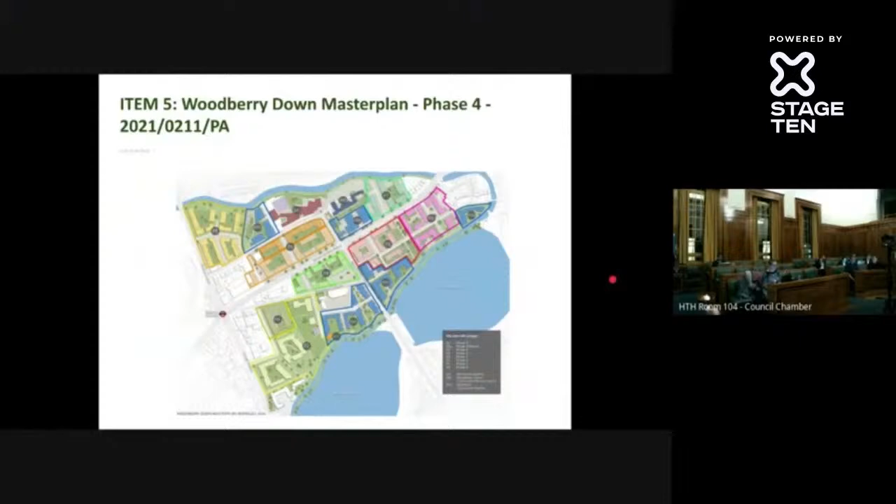The applications have been split out now as a result of various logistical requirements. So phase 4 is being submitted as a standalone application for full planning permission, with submission anticipated fairly shortly, and the remaining phases will be submitted as a master plan in due course. This isn't particularly clear, but phase 4 is located in the centre of the master plan area to the southwest of the junction of Seven Sisters Road and Woodberry Grove. It is within the larger site allocation within LP 33.

So as a result, its redevelopment for housing is acceptable in principle, subject to a suitably high quality scheme coming forwards that delivers other public benefits. The main proposals are going to be set out by the applicant this evening. They have been evolved in relation to the design from what you've seen previously. They have been subject to a level 1 and level 2 GLA pre-application process and TFL pre-app. And I'll now hand over to Martin, who will talk you through the detailed proposals.

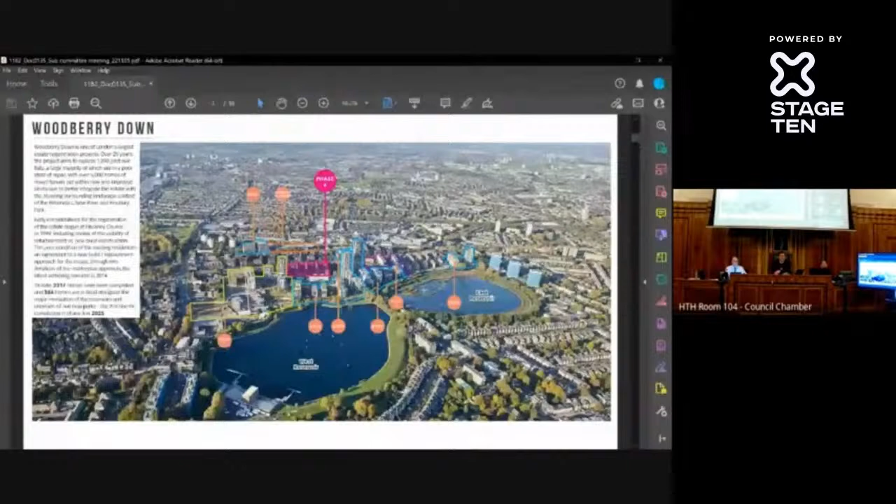Good evening. Right, I'm just going to share my screen and then we'll start. Great. Sorry, is that everything okay? Yeah, great. Thank you very much. So sorry, just for my knowledge, we've got quite a few in attendance here. Who is leading from your side? So my name is Martin Keefer. I'm the architect for the scheme, and I'll be leading the presentation. Perfect. Thank you very much. Off you go.

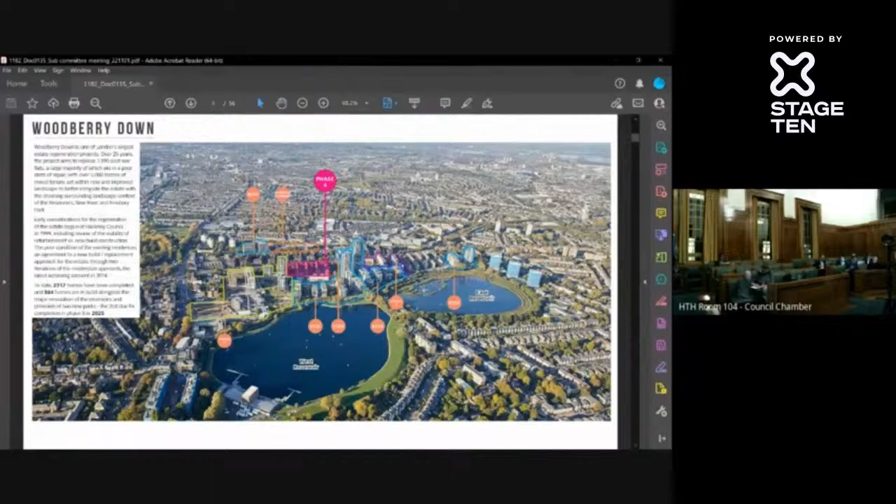Right, pleasure to be back here after a year and with some more detail on phase 4, which has evolved, as I hope you'll see, into a very forward-looking, high quality architectural scheme. I won't talk too much about where it is. Hopefully most people in the room are familiar with where phase 4 is on the scheme, but it does sit right slap bang in the middle of the evolving estate at Woodberry Down. That's the current site outlined in red on the screen. So we have Seven Sisters Road to the north, Woodberry Down to the south, Woodberry Grove to the east, and then St Olave's Church on the west side. Currently 6 existing housing blocks and about 200 dwellings.

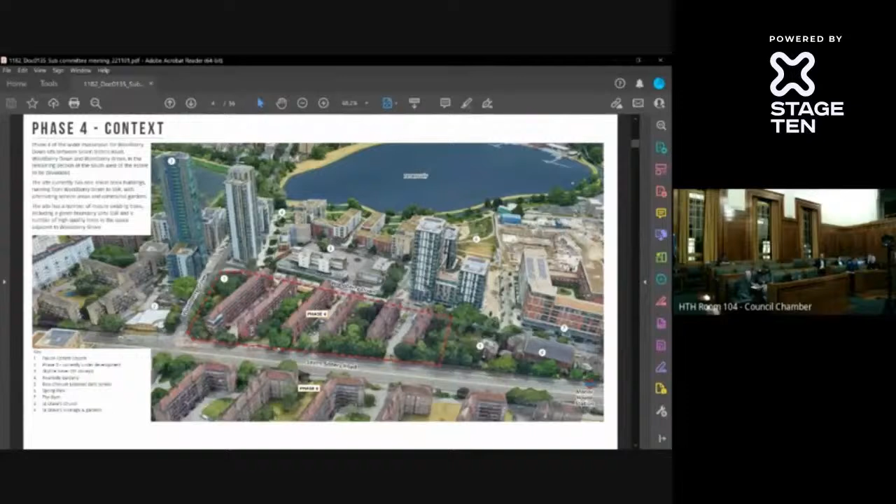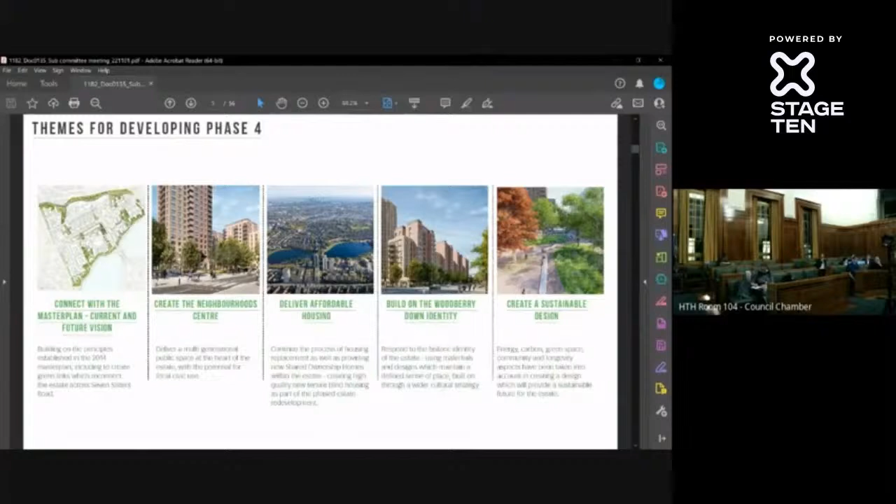What we'd like to do tonight is to start off by talking about some of the themes that have led the evolving design and approach to phase 4. They're summarised there on the screen, and I'll go through these in more detail. We're going to talk about how, while this is a standalone application, it does take into account the previous and the developing master plan. We're going to talk about public space particularly, and the importance of delivering the neighbourhood square, which sits at the centre of phase 4 as part of that wider master plan vision. How the scheme delivers affordable housing, how it's been developed specifically to respond to the Woodberry Down identity, particularly the historic environment at Woodberry Down, and we'll talk about sustainability as well.

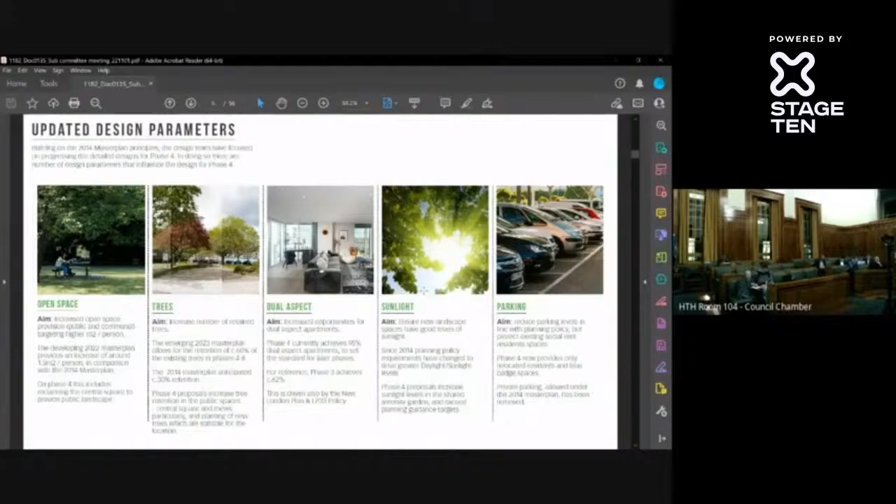Just to say that the scheme has evolved in response to a developing planning environment since 2014, when the original master plan was conceived and consented. So there are a number of things that are on screen. I won't go through these in detail, but these have been embedded within the developed design, from a greater consideration of trees and how we can retain more trees as a very pertinent local issue on the plot, to how the scheme responds to changing policy on things like dual aspects and sunlight, and we'll talk about open space and parking as well as we get in, because those are quite key factors in delivering phase 4.

So this is where we are today. Site outlined in red, sitting right in the heart of the Woodberry Down estate. Developed sites from the KSS sites through to phases 1 and 2 on the south of the plot, and then phase 3, which is currently under construction. And as we said, we are building in an environment that is part of that master plan. I'll talk a little bit in a minute about how that is achieved. But we're also part of a number of huge achievements that have been made at Woodberry Down and the developing environment down there, particularly around the reservoirs, and that's something that we sought to bring into our proposals.

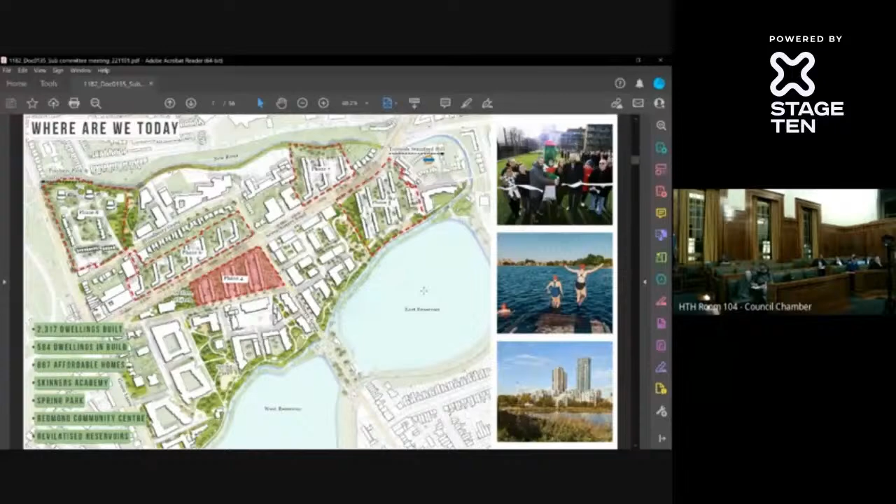That really has 2 significant impacts on us about delivery of public space, 2 key public spaces, one of which is the central square, which is going to be the main civic hub for the developing estate, and a more urban central space than they have currently, rather than the parkland that exists around Spring Park. And then there's another mews space that sits between our plot and St Olave's Church, again, part of creating that north-south connection across Seven Sisters Road.

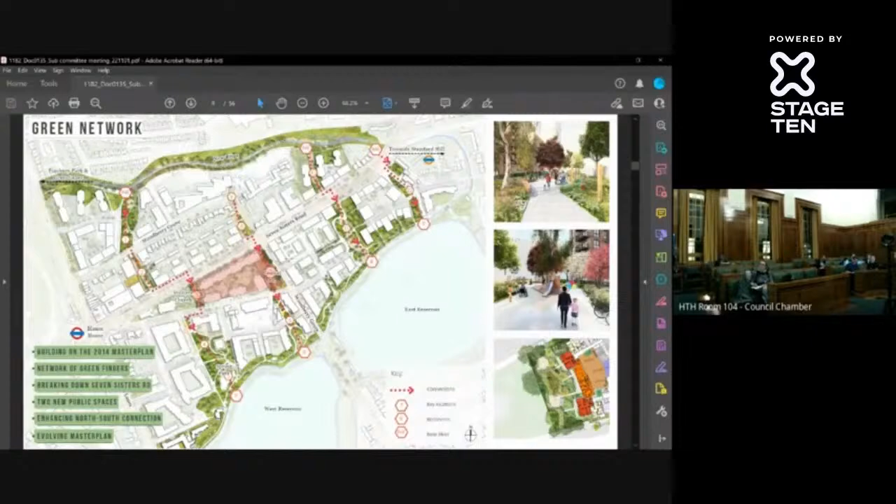That leads us on to thinking about Central Square itself, which is the kind of public set piece that will be at the centre of the development. We have evolved the scheme since the 2014 proposals to develop it in a way that responds, we think, more to the directionality and the routes within the scheme. So it previously was an east-west facing square, and now more of a north-south arrangement. That's really, as I say, to connect it into those north-south routes, so it's more one continuous green space as you approach Seven Sisters Road.

That change of orientation has also allowed us to retain more trees, and there are a significant number of very high-quality mature trees within that space currently, and we are maintaining all of the A and B category trees. That allows us also to build on their character to create a really vibrant and high quality public space that will be ringed at the ground floor with a combination of commercial and community uses.

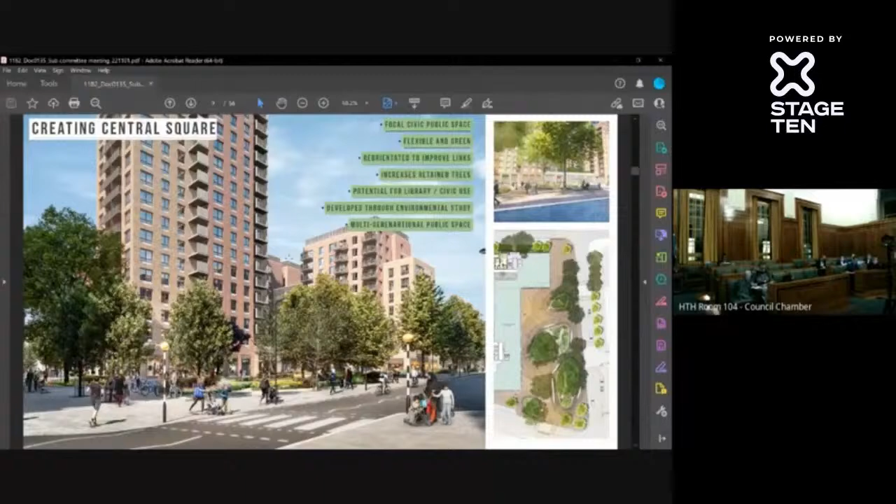There is ongoing work at the moment with the council to look at placing a library within that space as one of the main inhabitants. That's something that will likely go on beyond the submission of the application, but is a key part of delivering a civic space in the centre of the scheme. Mark will talk a little bit later about the landscaping here.

So we are also creating a significant amount of new housing, which is a combination of social rent, shared ownership, and new market housing. We have some tables later in the document that provide the exact split, but the total is 473 new apartments, just under 50% affordable by habitable room, slightly lower when you look at it by dwelling, 44%.

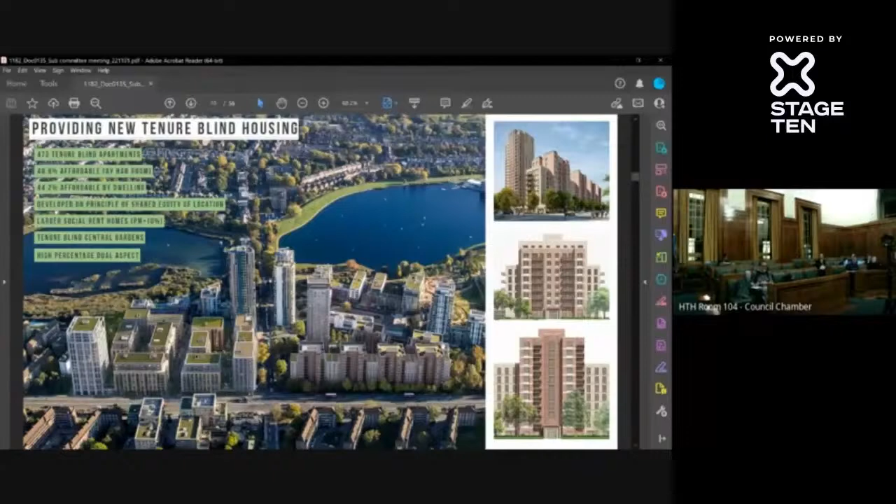It's been developed with the design that's inherent within the PDA agreement at Woodberry Down, which is a shared equity point of view, although we've taken certain decisions on the locations of shared ownership here, which I'll talk about when we get to the plan. And that's been done for some very specific reasons to reduce rental charges.

In terms of identity, this is something that we looked at and talked about, I think, briefly in the last presentation. We have looked quite carefully at the historic environment around the estate, not just at the new blocks, but also what qualities those existing blocks have, because they are very characterful, particularly the red brick buildings, north and south of Seven Sisters Road. And we've tried to build on that character in the delivery of a scheme which references Woodberry Down, but still looks modern and delivers high quality housing.

This is a view looking at the scheme from Woodberry Down towards Central Square. You'll see this probably a couple of times in the presentation as we go through. Predominantly brick with white banding and detailing that references back to the estate. We've also looked at and developed with consultants DPQ a cultural strategy for the site, which also takes elements of the local environment, and thinking about things like the signage and how do we build an architecture and a scheme that is specific to Woodberry Down.

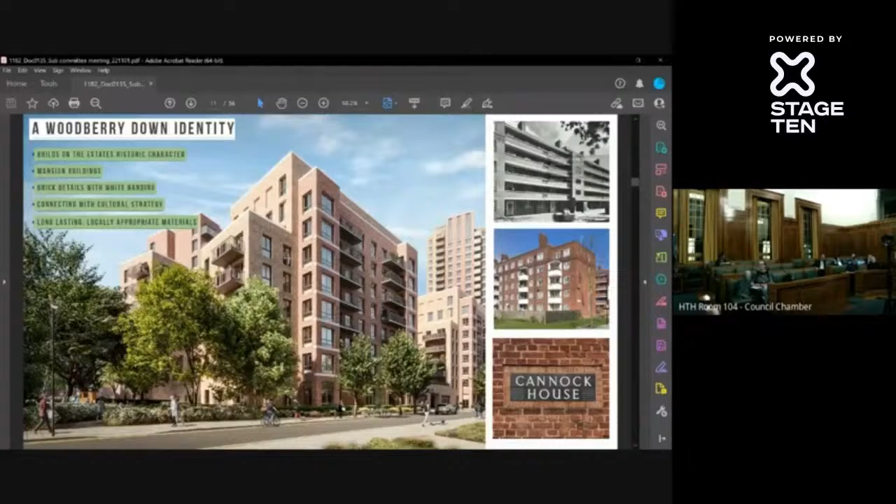And then just a quick slide on sustainability. We can build on this later on. The scheme does achieve GLA net zero carbon. It is part of a wider approach to decarbonising the estate, and we can talk a little bit later about how that's achieved in terms of energy performance. These things sit alongside a general approach to landscape and urban greening, which will create a very green site, both in terms of the public realm and the shared communal gardens in the centre.

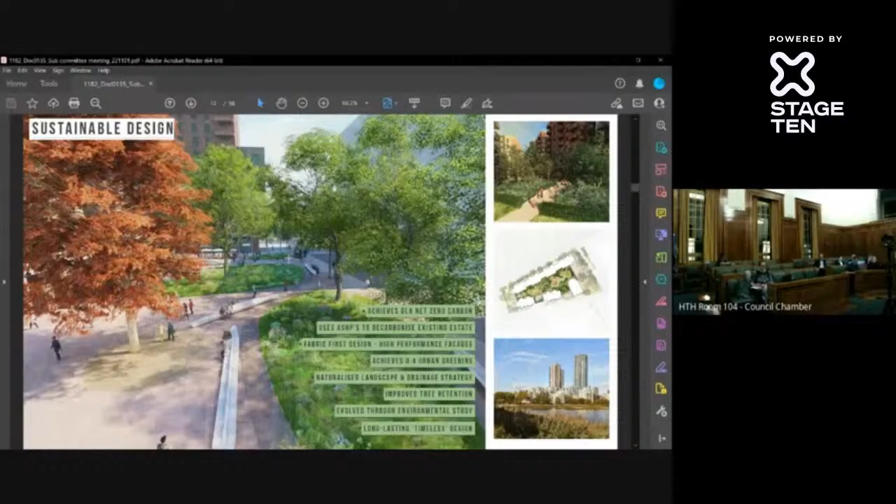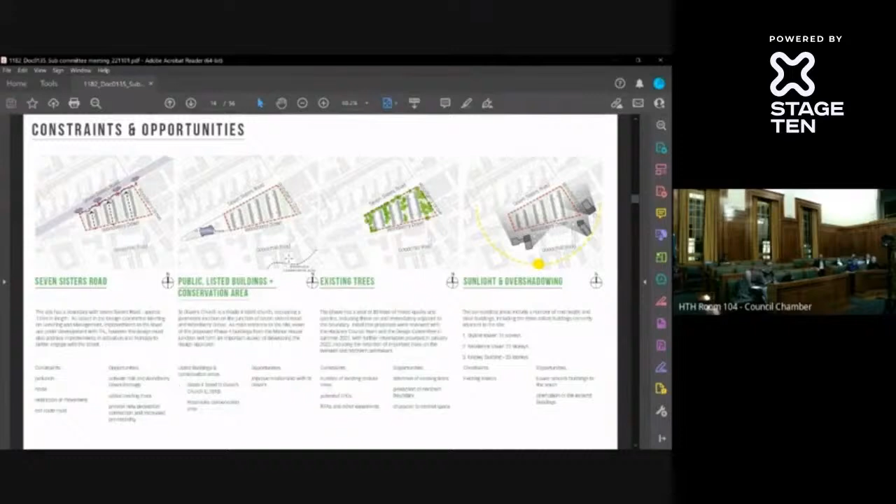I don't propose to dwell on this too long, but these are some slides that look at the issues that we're trying to resolve at Phase 4. So from things like Seven Sisters Road, which we know creates a noisy environment, the existing trees, which we've worked very hard to retain as many as possible, and sunlight and overshadowing from some adjacent tall buildings. Just to say that these things have been embodied in the design, and when we're looking at them particularly from an environmental perspective, I hope you'll see that those things have really led how we've approached the massing particularly.

These slides just look at the basic configuration of the site, and this is probably clearer in the next couple of slides, but we've looked very carefully at issues like permeability, how you move around the site. That goes back to the principle of the north-south links. We've looked, after review with your DRP, particularly at how the character of the buildings changes and responds to different conditions around the site. So from Seven Sisters Road, which is a much broader, larger scale avenue, to Woodberry Down, which is a much narrower environment. And that leads to a certain approach with differences in the building design, which we'll show you in a minute.

All of this has been underpinned by an approach to sunlight and daylight, particularly where we're looking very, very hard at how we get daylight and sunlight into the public spaces, into the apartments. And we have some real success stories in there in achieving really good quality and well-lit shared amenity spaces.

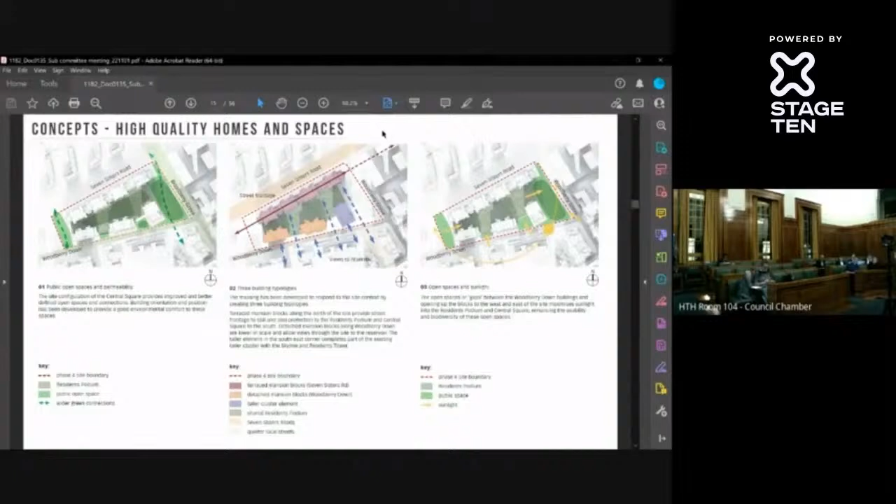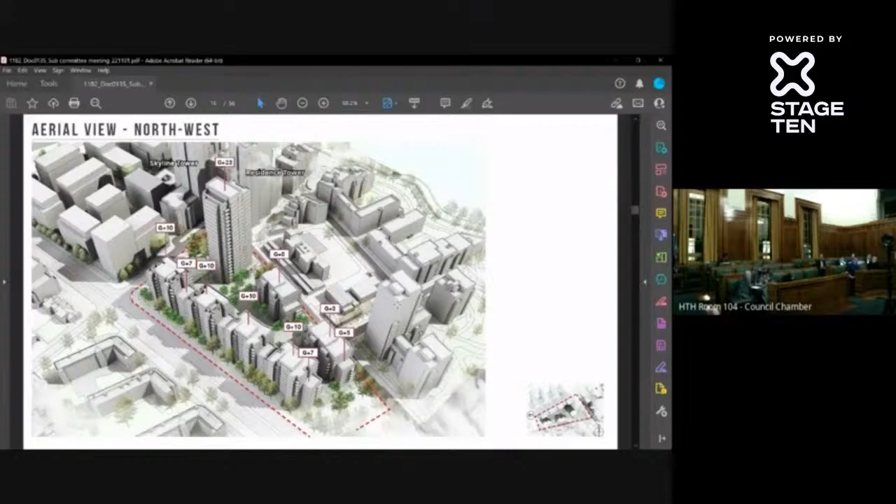Behind that, there are two lower buildings on Woodberry Down. They are ground plus 8 storeys, these two with lower shoulder sections. And again, they're starting to think about that smaller environment along Woodberry Down. And then in the corner, the taller building, which is ground plus 23, sits below the two existing buildings, which are 31 and 27 storeys. So almost the little brother of those three. The placement of the tower has been developed in response to both local townscape issues and wind and microclimate views, which we'll evidence shortly.

Just another view looking back, as if you were standing on top of Residence Tower, back towards the plot. And one thing you begin to pick up in this view is, while the buildings on Seven Sisters Road are more continuous, those on the south of the site have significant gaps between them. What you're seeing in the middle there is a podium garden, which is shared by all of the surrounding buildings on phase 4. And those gaps between the buildings go a long way to creating good quality sunlight, both in that communal space and within the apartments that surround it.

So this is the site plan. It's a section taken through at first floor level, looking down. So you have the configuration of the buildings on the north and the south, and then you see all of the spaces in between. To be clear on this drawing, the green spaces that you're seeing are at 2 different levels. So the space in between the building is at first floor, and then the surrounding spaces, so between St Olave's Church, the Mews on the left-hand side, and Central Square on the right-hand side, and the spaces ringing the roads, they're all at ground floor.

Mark will talk a bit later on about how this helps us achieve very high urban greening factors, but it is, when you look at it from above, a very green site, and we're creating a lot of space for residents of the site and of the estate to utilise.

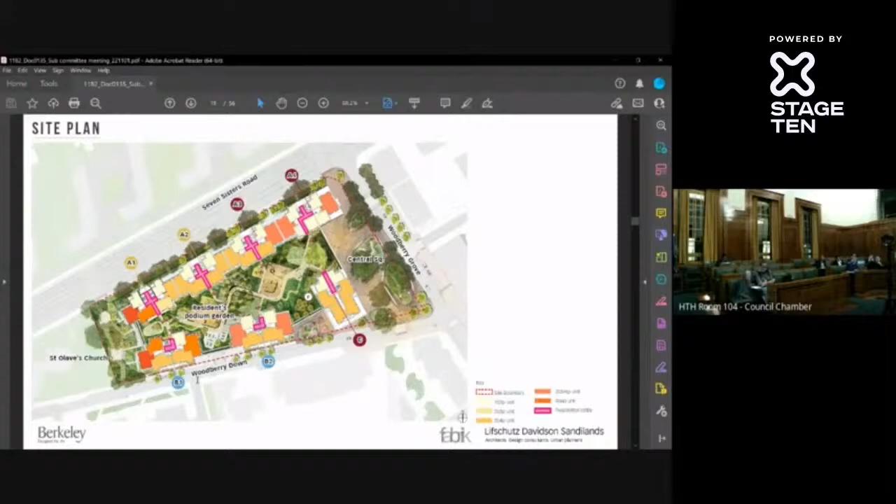We started off with a slightly different arrangement here, where actually there was 1 of each tenure on each side. As part of the work that we've done with the local community through the design group, that has been amended with a particular focus on service charges. So by locating the social rent on Woodberry Down, we can ensure that those buildings are serviced as easily as possible. So they don't have to use the podium that sits between the buildings, and that means we can keep the service charge for those residents down. I'll talk in a bit about the podium in that.

So this is then the ground floor of the building, as you see, stripping away that podium garden. What we have here is a central space which is largely providing parking. Now in this case, 64 parking spaces. This is being driven by part of the estate regeneration approach at Woodberry Down, which protects residents with existing parking spaces. And the work that's been done on the expectation is that the number that will move into here with parking spaces will then be accommodated within that space. It's not all of that. There is some disabled and accessible parking within there that also goes towards achieving other aspects of policy.

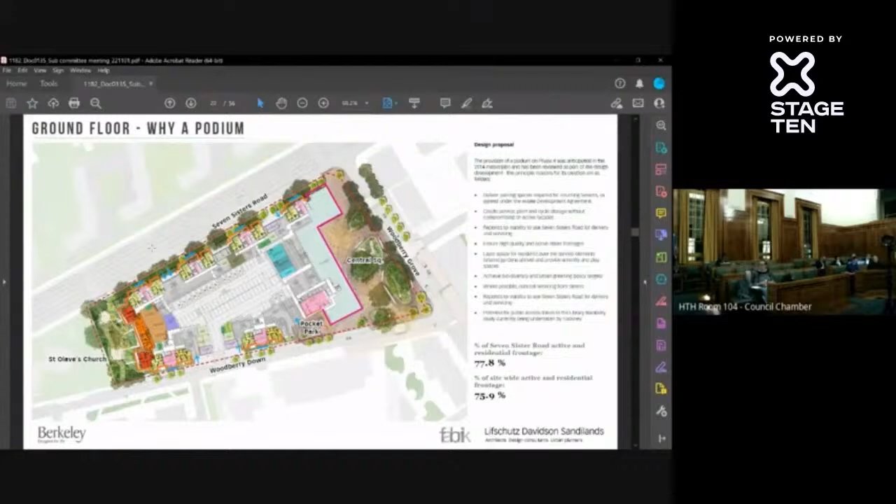What the podium does allow us to do is conceal all of that away from street. So the building is actually largely surrounded by active uses, be that housing, or in the case of facing onto Central Square, the shops and retail units. Overall, approximately 75% of the perimeter is active. And that's, as I say, largely achieved by using the podium to conceal the bins, the bikes, and the parking space and the plant spaces in the centre.

A couple of slides on the environmental studies, and I'll talk a bit more about the right-hand one, which is wind. But as I say, we have looked very, very carefully at air quality, noise, solar exposure, and wind as a particular local issue. I won't go into these in detail, but the design has been heavily informed by making sure that in terms of sunlight, the central spaces are all well lit, and we achieve, I think, compliance with the BRE design criteria on sunlight with about 90%.

In terms of noise and acoustics, the building form being more continuous onto Seven Sisters Road actually shields the rest of the development. So noise conditions within the podium garden, and for those people with windows then on the south side, are protected from the noise of Seven Sisters Road.

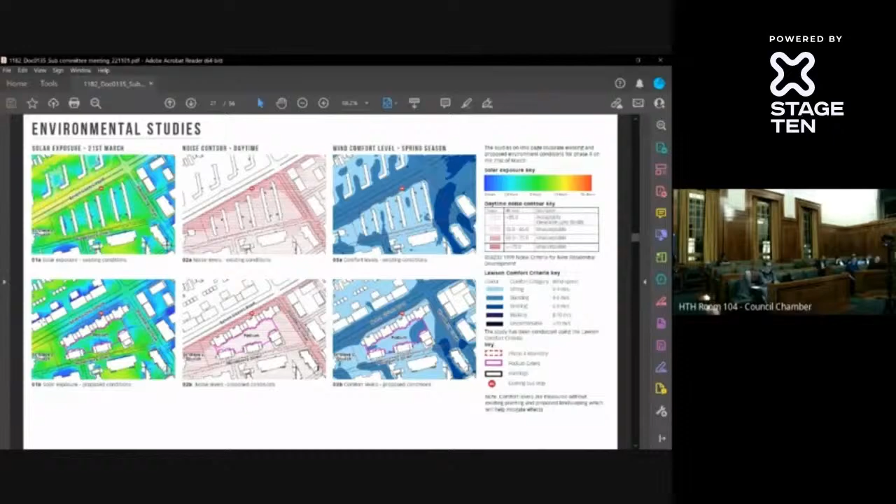And in terms of wind, we're aware of the issues that residents have felt around the base of the two existing towers, and have been working with RWDI as a wind consultant throughout the development of the design to make sure that the conditions within the central square are suitable for its proposed use as a civic space, and one that people and residents can enjoy.

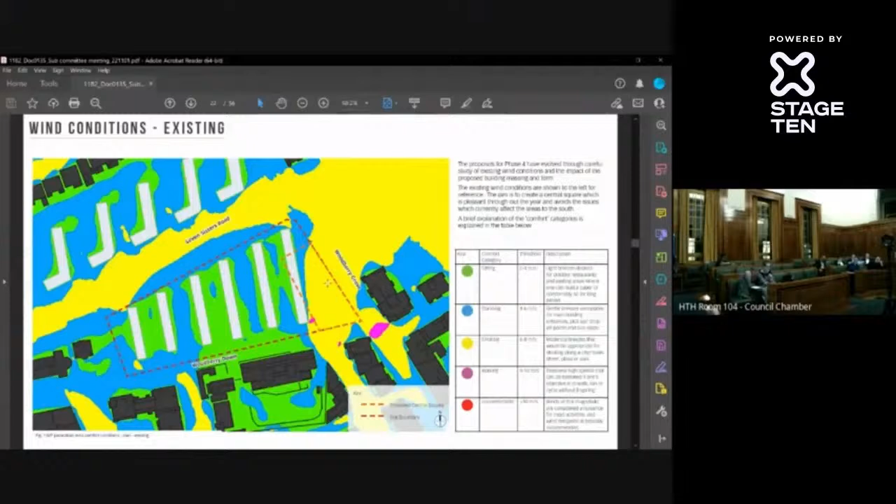This is actually the existing conditions on site, and you will notice the green colours are sitting quality, and then it works through the colour range down to the more uncomfortable ones of walking and uncomfortable. And the existing studies do show issues around the base of the two towers in particular, but largely in the current condition what will be the central square is in a yellow condition, which is predominantly for strolling rather than sitting.

As I said, this has really informed the way that we have approached our design, and we've worked from the start with the wind consultant to ensure that conditions within that space are positive and suitable for use. That goes back to the developing of the massing, which the way that it raises from St Olave's Church towards the centre with the predominant wind flow is actually helpful for getting the wind over the site and over that square, to consideration of building form, the canopies, particularly around the base of the building, and the landscape design.

And where we are ending up, these couple of slides show the development along the route, but the current anticipation is that wind quality within that space will be predominantly within the sitting category, so suitable entirely for the purpose that we want to use it for. There is some standing that comes about as a result of the two existing towers.

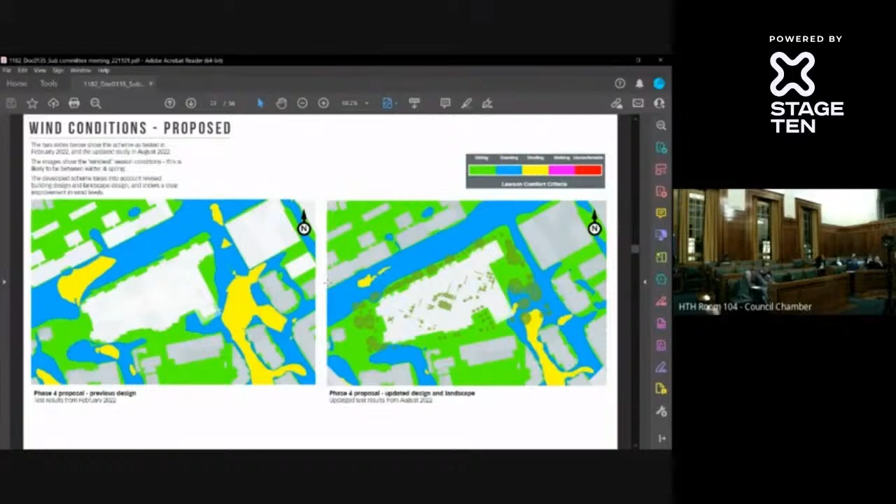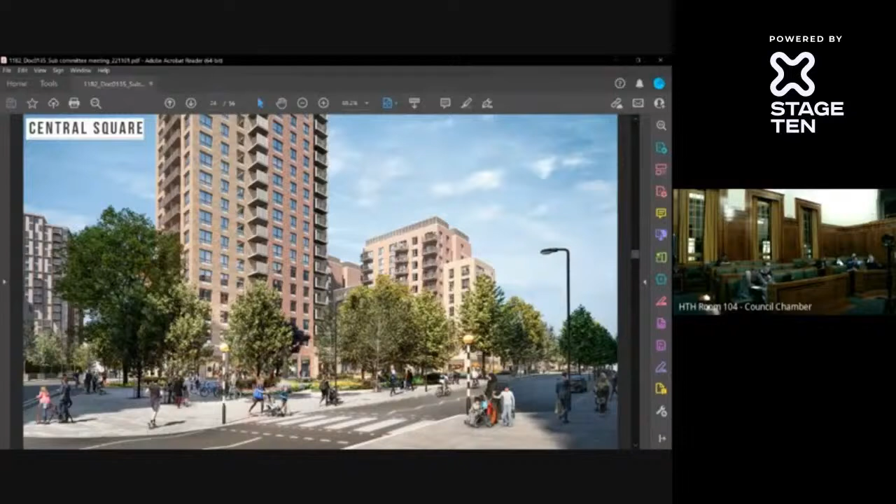So back to that image of a central square and the place that we are looking to create here, framed by the new buildings on the far side, although worth picking up on in this view. So one of the things that we did very early was ensure that there was a gap between the tower and the buildings on the north side. What that does for that space is make sure that you actually get sunlight in it from various points in the day. So you'll get sunlight within the afternoon for different types of activity and purpose.

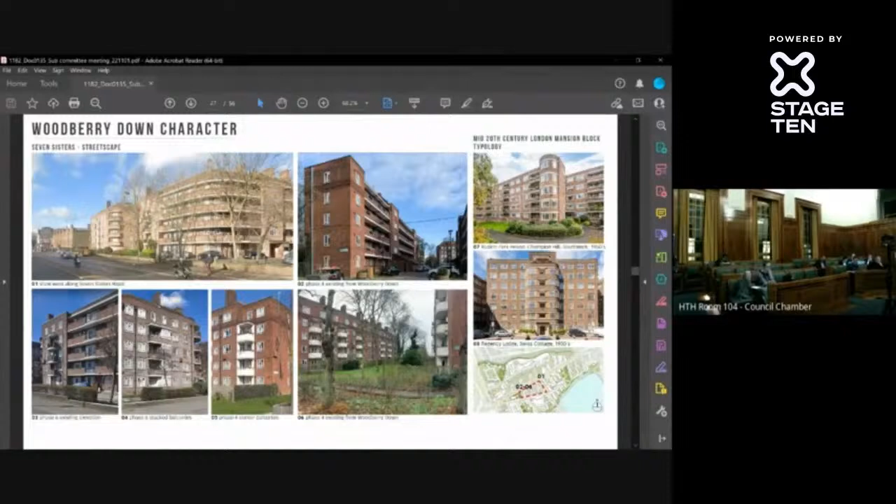Well, it predominantly means brick buildings, often quite simple in terms of their configuration, but they use features like the white banding that's quite characterful at the estate at the moment, and vertical bays within them to create views. And those are all things that we've embedded within the developing design.

3 building typologies, as we explained: Seven Sisters Road, Woodberry Down, and the Tower building. And I'll just quickly show you what that means. So this is one of the buildings that faces onto Woodberry Down. The 2 buildings are principally the same. They vary a little bit for precise configuration.

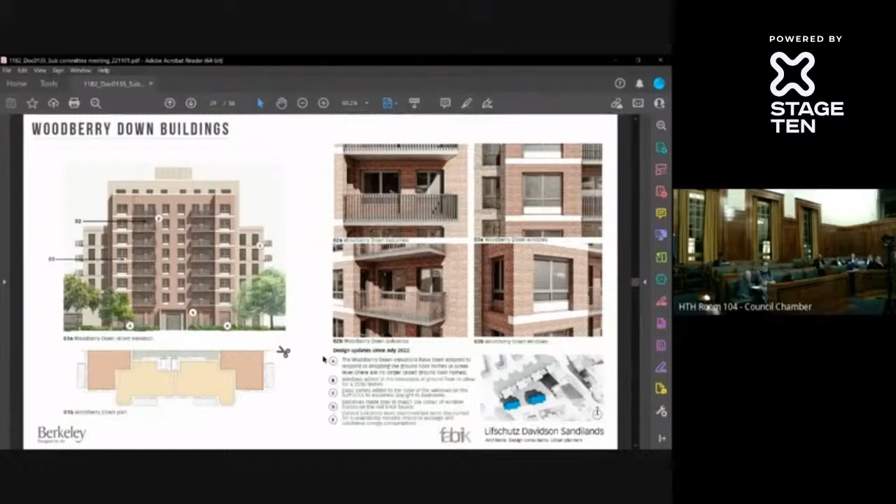So they have a central entrance at ground floor with a covered canopy, and this is where we're looking at some tile details to build on that historic tiled building entrances as part of a characterful part of the streetscape, but a very clear entrance in the middle of the building. 9 stories above that with a combination of red brick and buff brick, using bay windows particularly to build on the design.

And if I flip to the plan, the buildings use a central stair and lift core, with clusters of apartments either side. This is done quite carefully to ensure that there are little groupings of entrances into the flats at either end of a short corridor, so not big long corridors, naturally daylit wherever possible, in this case actually through borrowed light through the stair, and then a building form which uses a lot of corners and projections to get dual aspect into all of the apartments.

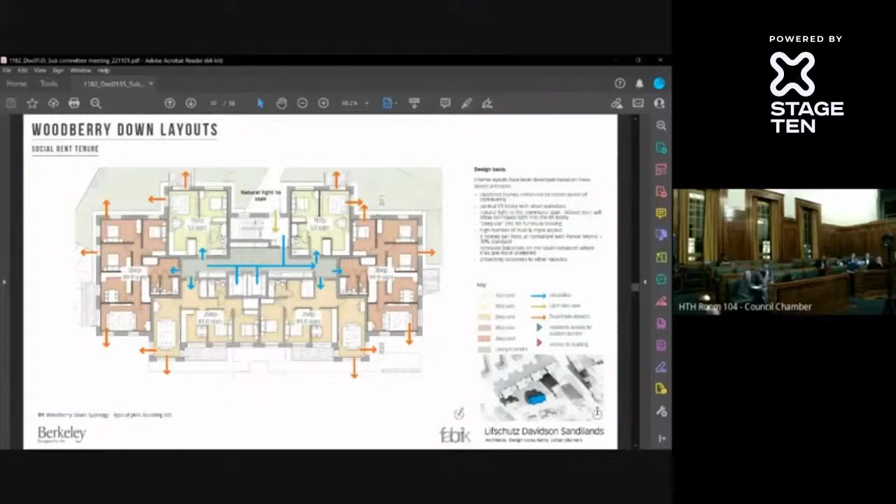You'll see that theme actually continue in the buildings on Seven Sisters Road. So this is looking at it from the Seven Sisters Road type. These buildings are taller, up to 11 stories. Again, central bay, configured around a central entrance with similar qualities to the one that we were looking at on Woodberry Down. Lower shoulder sections between of ground plus 7, sorry.

Now, one thing to pick up on here was whereas the Woodberry Down buildings are entirely symmetrical, in this case you'll see that the building on the front is actually asymmetrical. The balconies are both on the same side. That's been done in response to wind and daylight conditions, so that for both of them the balcony gets the benefit of west-facing sunlight in the afternoon.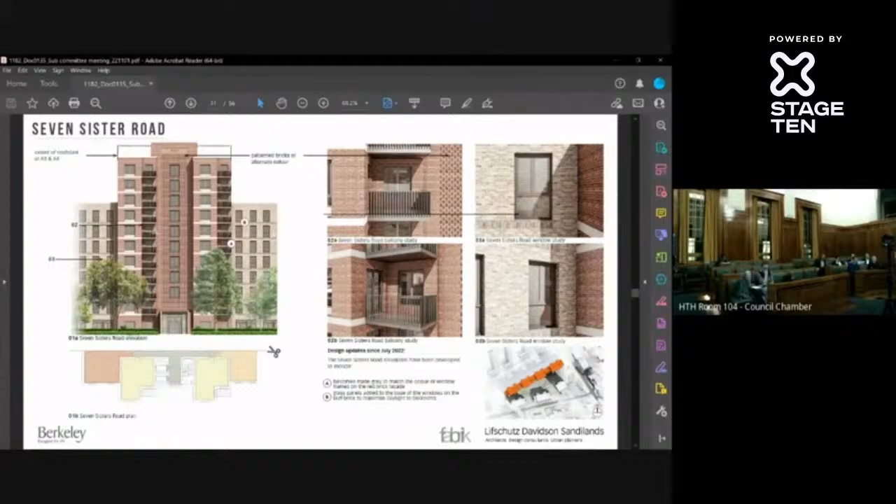Again, similar type of plan. Short corridors with clusters of apartments. In this case, because the buildings terrace along the length, the apartments on the ends are through apartments, so run from Seven Sisters Road through to the south to get dual aspect on those properties.

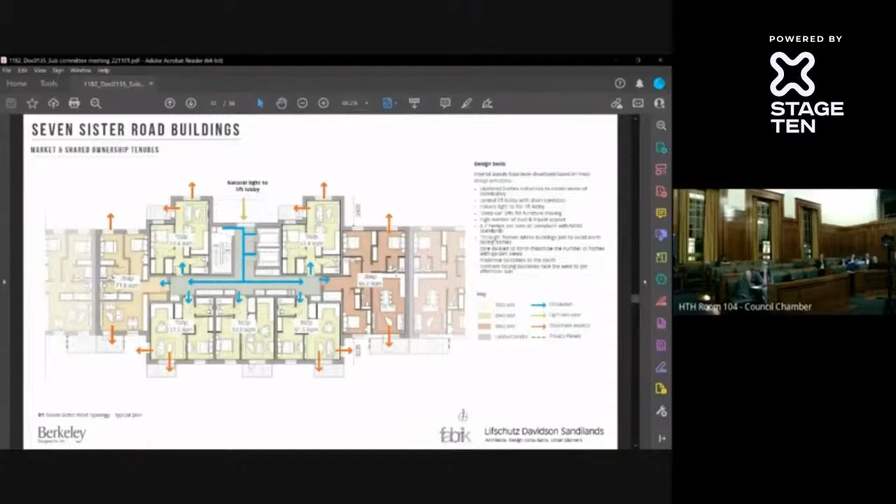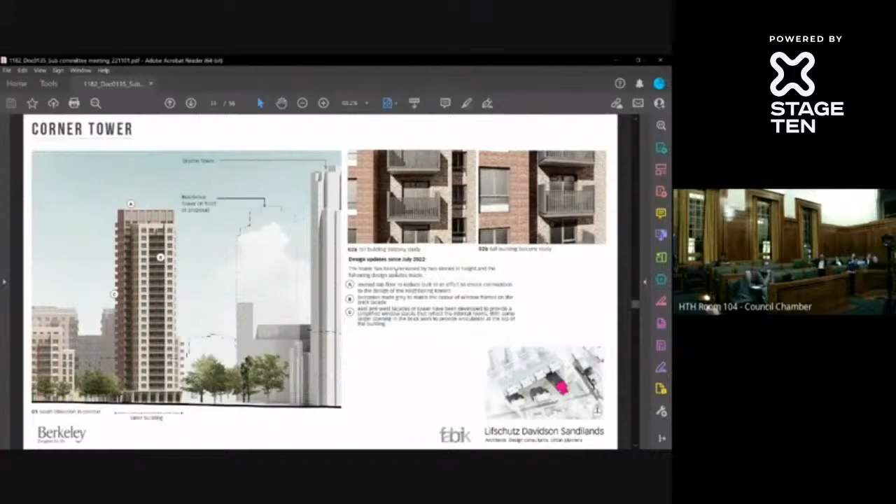And then lastly, the tower, which sits at the corner of the site, 24 stories tall with quite an expressed ground floor that develops into the commercial and community areas around the square. The building's broken down into several segments, so there's a variation of height in the top, and you'll see how that appears in some of the views. But again, it uses the same palette of red and buff brick. I won't go into this in too much detail, but the plan's there if there are any questions later on. It follows very much the same principle as the other ones, developing large amounts of dual aspect around the core.

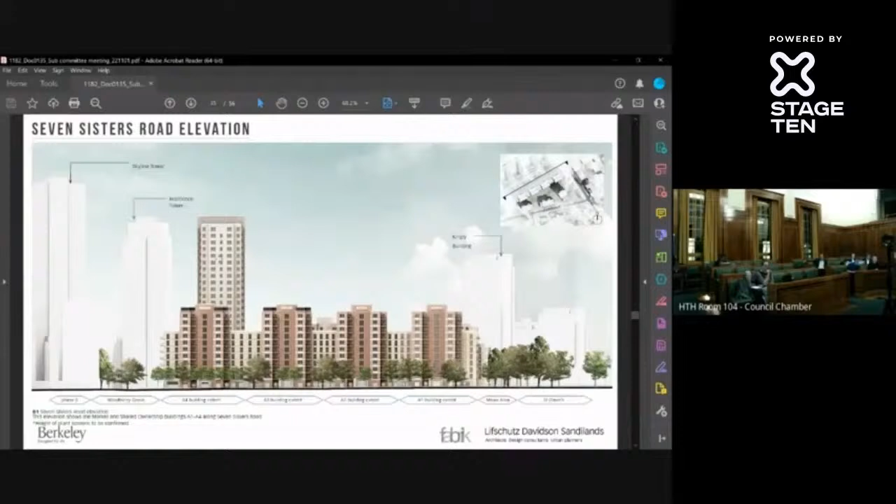And then looking at the combined set of buildings, so this is looking back from Seven Sisters Road with that developing skyline of the buildings along the front, so the variation in height that gives the road a rhythm to it, with the tower peeking up in the background, set behind those mature trees retained on Seven Sisters Road. Looking at the same proposal back from the corner with Woodberry Grove, central square on the left-hand side of the image, and then working back towards Manor House on the right.

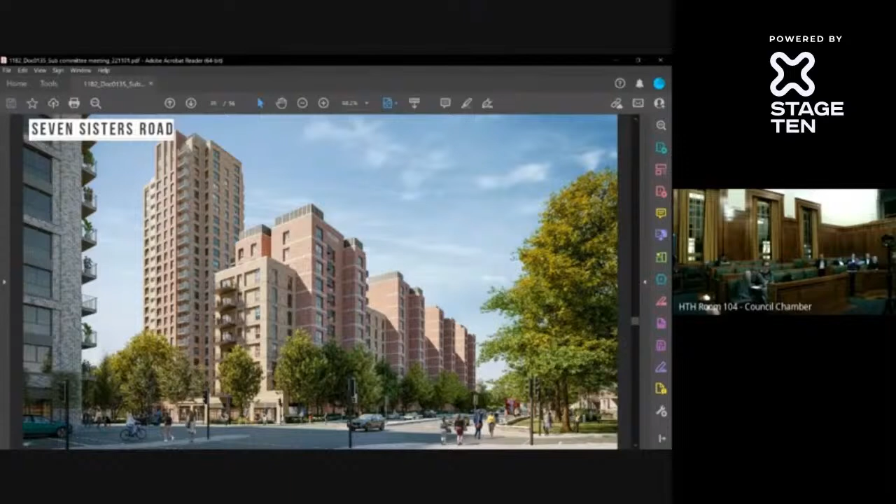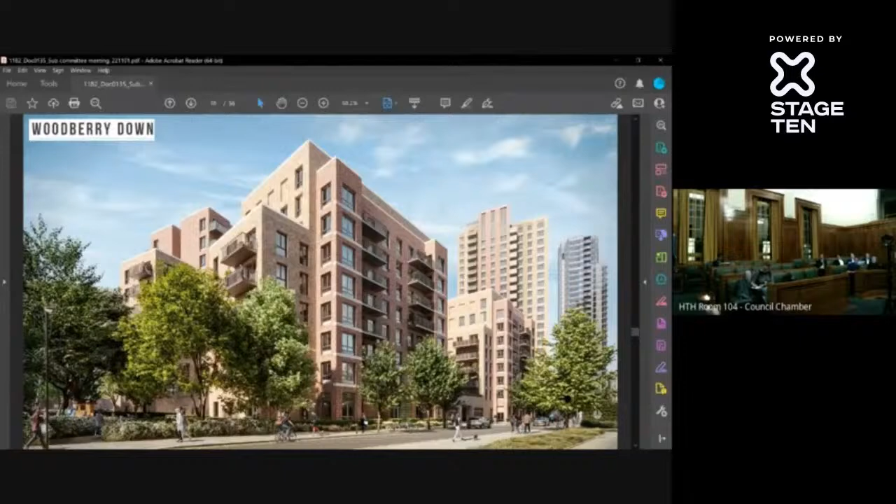Looking at the site from Woodberry Down, in this case with those individual buildings with the significant gaps between them. And back to that view, which is looking at the site from Woodberry Down. On the left-hand side is the pedestrian connection that is referred to as the Mews, and that's because it has duplex accommodation at the ground floor, part of the delivery of some of the family social rent dwellings. They look on to a landscape space that will also deliver play space for use by residents of the plot and the estate.

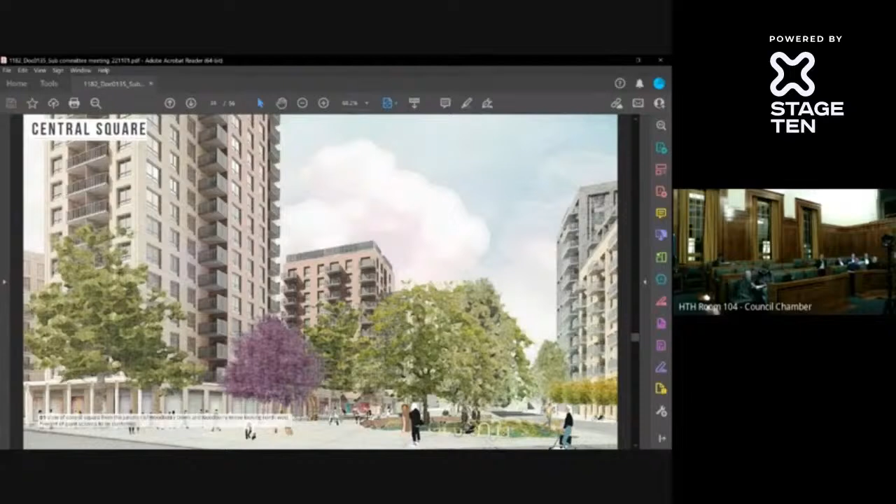And then finally, looking north from the junction at the base of Central Square, with the tall building on the left and the Seven Sisters Road buildings at the back there, built around, as I say, the retained trees in the centre. So I'll hand to my colleague Mark, who's going to talk about the landscape design.

Good evening. My name is Mark Bell. I'm from Fabrik Landscape Architects.

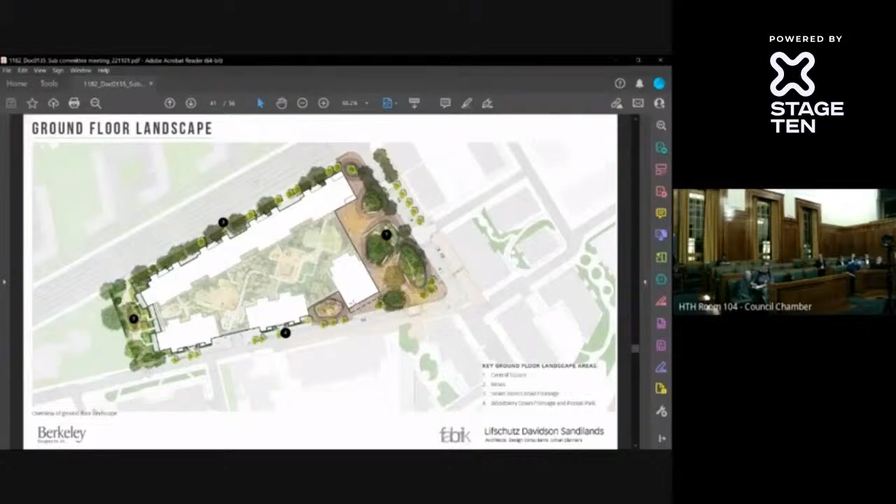On the first slide, we can see the 4 components that make up the ground floor landscape. Slightly hidden from view is the podium, which is a story up. There's a later slide which discusses that. Effectively, on the right-hand side of this drawing, you have the central square, which is circa 3,700 square meters. On the left, the smaller Mews space, which is a north-south space, with St Olave's Church to the left-hand side, and then to the north, Seven Sisters Road, and to the south we have Woodberry Down. Do you want to go to the next slide?

What these slides essentially show is the genesis of this design for the central square, which really is led by the retention of those trees and the protection of those trees and the incorporation of them as centerpieces in the design. From the get-go, we've been working with WDCO and listening to the community as to what makes this area distinctive. There's understandably a great pride in this area. And we all roundly agreed that it's the nature and the context that makes this distinctive.

And although Central Square and this site is somewhat disconnected from those obvious signs of that nature, that being the reservoirs and the New River, effectively what we tried to do here is hold up a mirror to that context and bring as much of that in as we can. So on the left-hand side, that shows the existing trees and the retention of those, which start to form this language of elliptical, soft landscape pieces, which start to frame the harder landscape pieces.

There is open space here that's designed to be mixed use and flexible, and try to lend as much life to the emerging building design as possible. So this envisages both a place that's on the way somewhere, so this is both a connecting space, but it's also about trying to slow people down and create a successful space in and of itself.

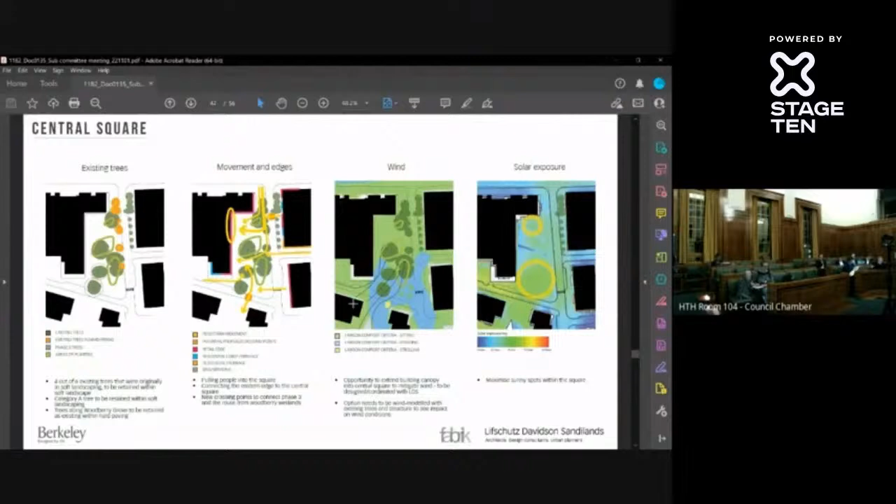So we've adopted an informal approach to retention of those trees. We tested all sorts of approaches to how formal this space is, and we adopted this informal approach of soft landscape islands, something that is evocative of a waterside location, and that runs into pretty much everything in terms of the approach we're taking.

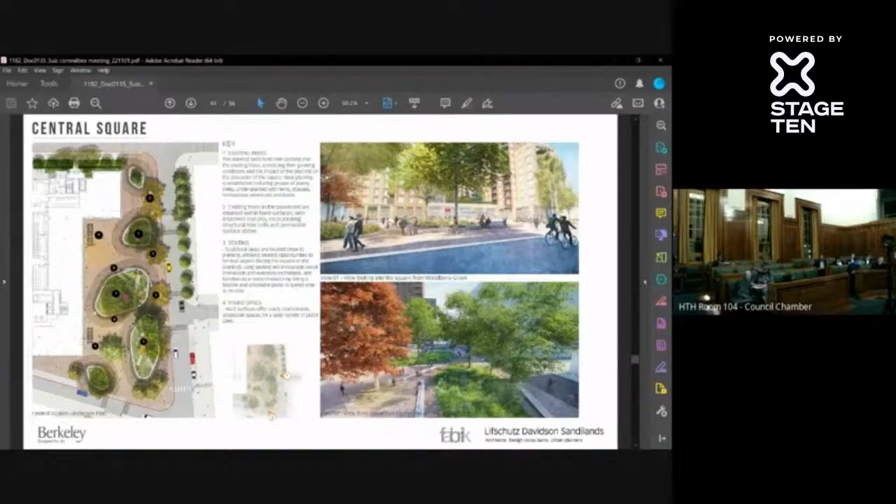So these soft landscapes are, where possible, bowled in order to try and collect as much of the rainwater as possibly can, but they're also designed with nature and biodiversity in mind. So what we're looking at is a functional, an engineered soft landscape rather than something that's merely visual amenity. Next slide, please.

Okay, just moving on to the Mews space, which is about 570 square meters. It's currently a backyard site, really. It's a very narrow route that's about 13 meters wide that passes from north to south. It's an informal route, but it's a route that not many people legitimately use. And then you have a building whose facade is approximately 13 meters away from the boundary. And then there's a 5-meter garden within that space as well. So it's currently fairly disused and possibly attracts antisocial behaviour.

So it's effectively an exercise in widening that space, creating a new north-south link, which joins up with the proposed crossing that goes over Seven Sisters Road. And there's an additional crossing to the south, which crosses Woodberry Down, and it's also an address to 4 of the units which look out onto that space. It's a very important piece of the play strategy as well. There are some very large retained trees in the centre of that which will lend it almost immediate character upon completion.

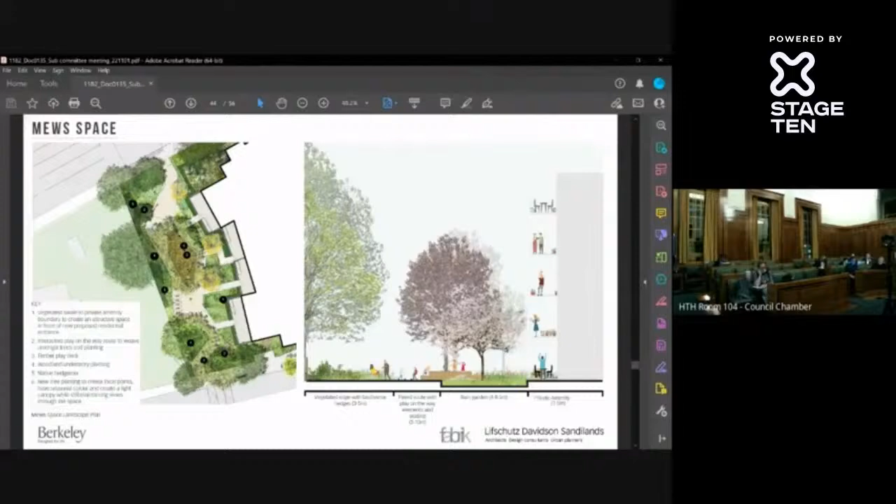Just a couple of views. The first view is looking south, and the next view is looking north. You can see play clustered around the mature trees in the centre. On that view too, on the right hand side, you've got a large piece of rain garden that separates the dwellings from the public space, and then on the left hand side you've got the boundary with St Olave's, and there's a group of mature trees down there that aren't accurately captured in this, but there will be quite a lot of retained greenery in that space. Next slide.

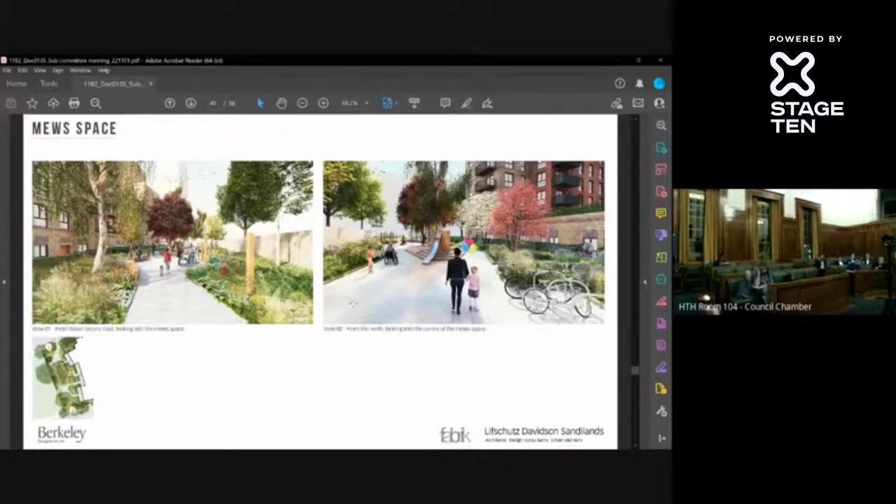Just looking at Seven Sisters Road briefly, Martin set out a very distinctive formality across there, and this landscape follows those principles with soft landscape which retains as many of the trees along there as possible. People who know the site know there are some very mature trees along there, and a lot of those trees are going to be retained and form entrances to the new building.

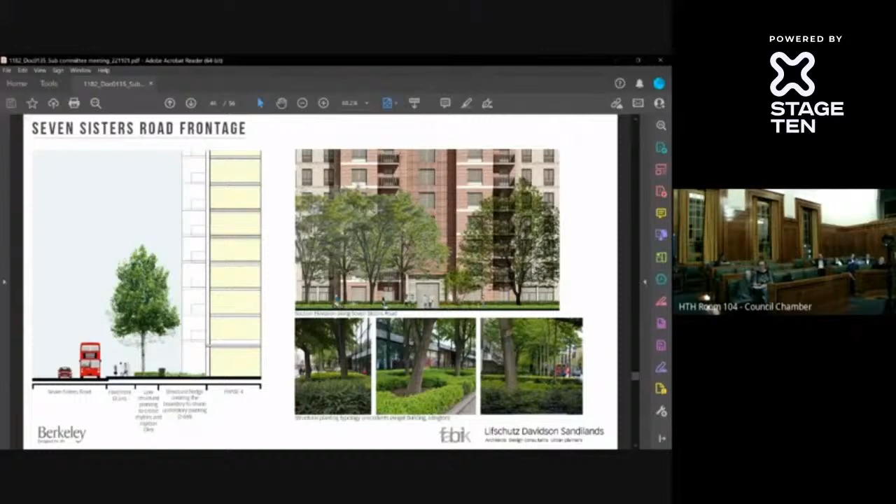So we're adopting a somewhat defensive approach, and really the space is about protecting the ground floor residential units from that busy road, which will be busy and smelly for the foreseeable future until traffic starts to clean itself up a little bit. But really, we've taken a fairly formal approach to this, which is in contrast to what we've done in most of the places on the plan.

And then just moving up onto the podium, it's about 3,600 square meters, just under 3,700 square meters. And it's effectively a mix of natural landscape types and distinctly programmed types, which include a large amount of play. So effectively what we're trying to do is leverage the spaces which will receive most light.

It'll be a southern light that comes from the bottom of this page shining upwards, north to the north upwards on this page. So you get these fairly generous openings, and then bands of sunlight passing across the site throughout the day, and we try to exploit those as much as possible with the main program spaces.

And in between those, there's moments of more intimate spaces, and each of that is linked via this sort of curving spine path, which links one side of the podium to the other. There's also growing opportunities on the site as well.

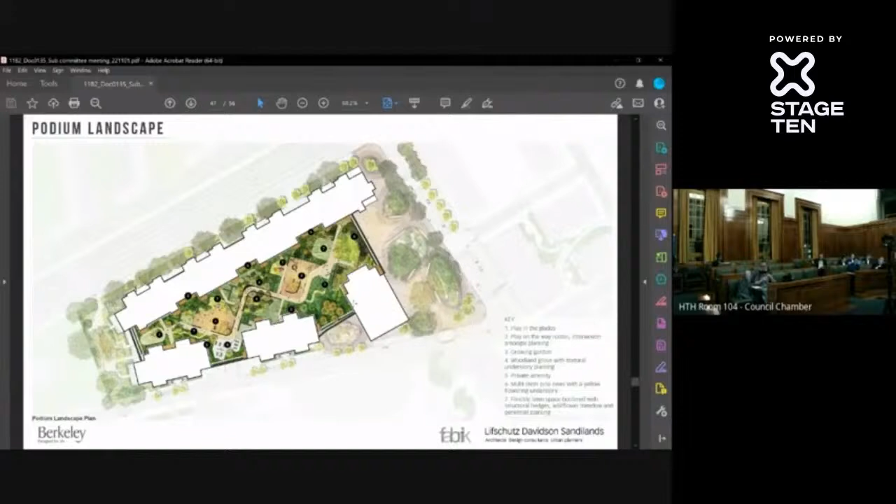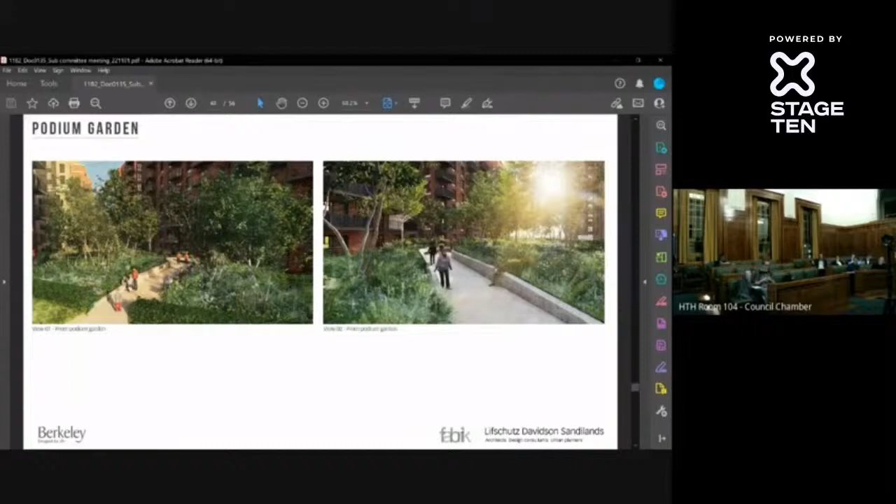Yep, next slide. There's a couple of views which just show a tightening up of landscape in the middle, creating a woodland space, if you like, in between the two glades, where I referred to trying to collect as much of that sunlight as possible. So just trying to exploit the natural opportunities of both shade and the sunlight offered by the building openings. Next slide, please.

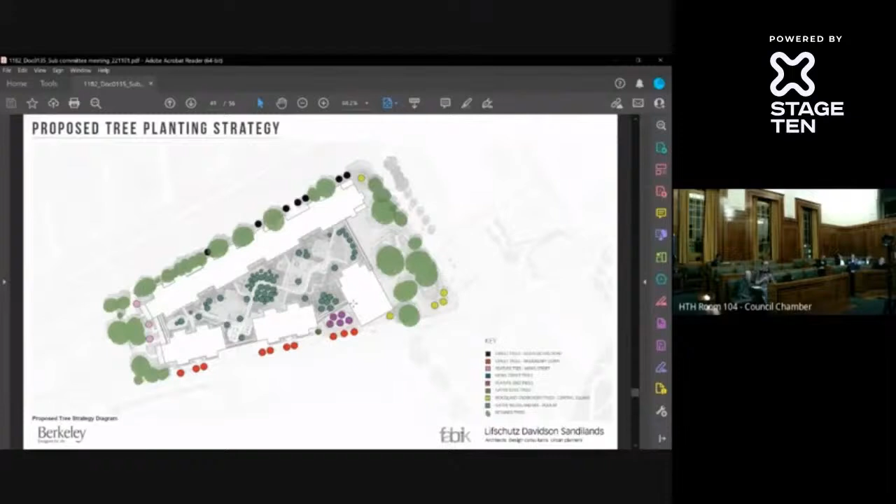Next slide. Okay, just to cover play, there's play at all levels. We are following closely Hackney's child-friendly spaces, and we're looking to get play into pretty much every part of this site. But the majority of that is on the podium. The GLA recommendation for a unit mix and number of this size is 1,700 square meters of play.

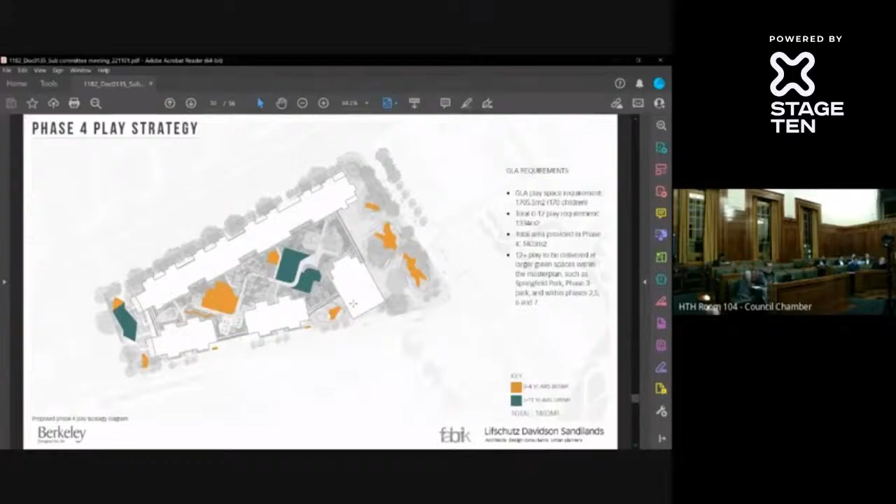Our focus is on the 0 to 12 age group, and we're achieving 1,400. It's envisaged that the older groups, so 12 to 17, will be dealt with off-site in other parts of the plan and with areas that are already existing and accessible. Next slide.

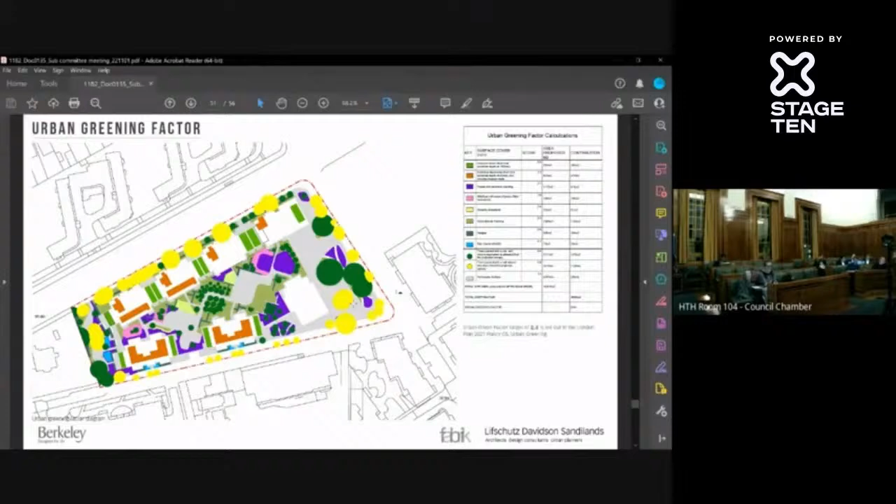Okay, this just shows a fairly complicated tapestry-looking drawing, the assessment for the urban greening factor. And we're currently achieving a minimum of 0.4, which meets the GLA requirements. Next slide.

And just to conclude this section, there's this slide on cultural opportunities, which has been developed through our work with DPQ, who have done quite a bit of research in the local estate. They've held a series of workshops trying to find out what things are important to building on the identity of Woodberry Down.

And as part of that work, we have identified a number of opportunities within phase 4. Now, these aren't set proposals at this stage, but they are things that we will look to develop through the application and beyond to make sure that the design of Woodberry Down is one that is local and specific.

And those opportunities range from things like the building signage that we've already talked about, and there are some examples in the bottom left of this image of community-led artwork used on a different estate in London, but to build something that is specific, through to opportunities for public art, both around the building in locations like the boundary with St Olave's Church,

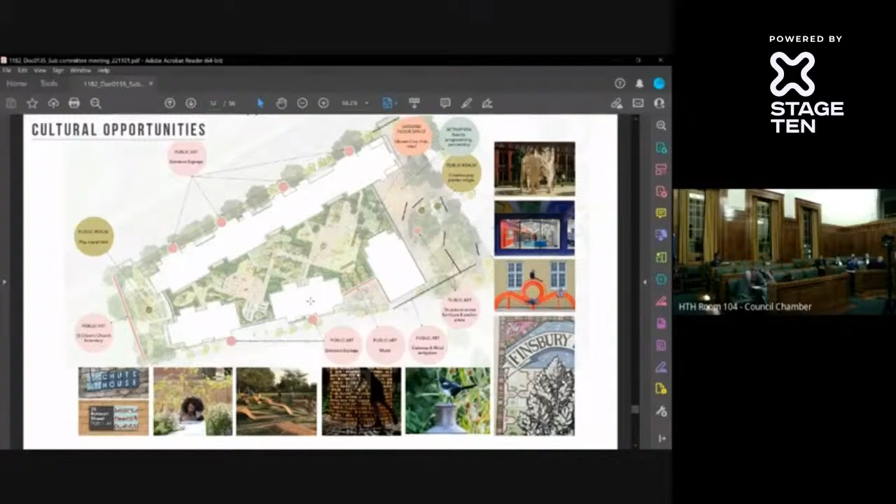where we have a rather negative boundary at the moment. There's a real opportunity to do something more with it, through to the design of Central Square itself, be that from opportunities around seating or murals within that space that can add a local distinctive quality to its design.

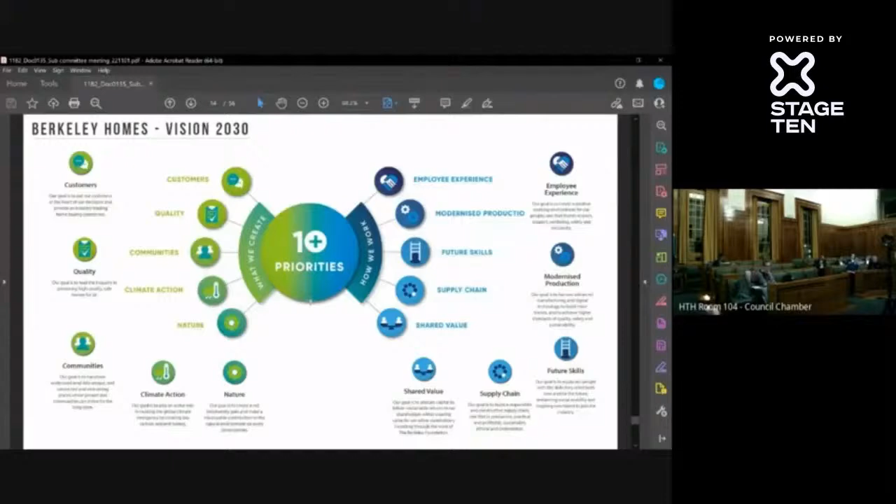And just to end this evening, a couple of slides on sustainable design. I won't talk to Berkeley's priorities in particular, but there is a vision for how Berkeley as a company are leading towards 2030 and carbon targets therein. But to talk a bit about the specifics of phase 4, and not only how it is sustainable from a design point of view, but also what it's doing for the wider estate.

So for those who've been involved in the estate, the estate has an energy network being developed within it, a large part of which is the energy centre that sits within phase 3. That was developed at a point of time where gas CHP was very much the leader in sustainable technology. Things have somewhat moved on.

So how phase 4 now contributes to that, there will be a series of air source heat pumps located on the buildings in phase 4 that will deliver low carbon heat, both for phase 4 itself, but also for all of the existing phases of the estate. So they are contributing to the decarbonisation of the KSS sites and phases 1 and 2.

That builds on the other aspects of the design. I've talked a little bit about how the development does achieve net zero. The specifics of it is roughly a 48% carbon reduction achieved through a mixture of measures on site, through high performance fabric, which reduces energy demand, through to the air source heat pumps as a heating strategy, and to things like PV, which we're using on the roofs on site for local energy generation.

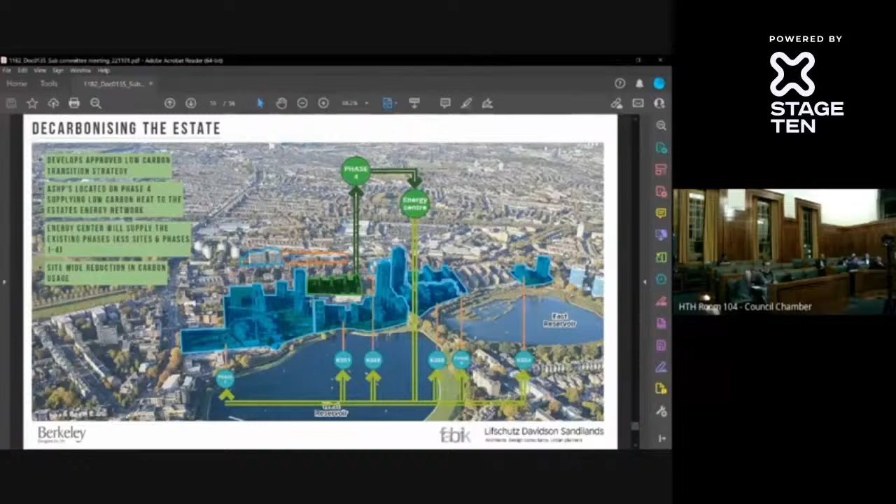That really is part of the energy and the carbon side of it, but is also built on by all of the landscape work that Mark's done, delivering a scheme which is very green and achieves something like a 20% net biodiversity increase on the site itself. And I think that's the end of our presentation for this evening. So over to you. Great, thank you very much.

Nasi, would you put the lights up? So thank you. Great. So committee, I thought it might be worthwhile attempting again to take it in themes rather than person by person on anything you fancy, because it's quite a big one, obviously. So tenure is obviously a big thing. Design, take that as you will in terms of unit design, building design, outdoor space is one, sustainability, I've got something on car parking that sort of fits outside. Are there any other broad areas, or are you happy for us to try?

I just wondered if we could take the podium as one topic. Yeah. Can I say the podium and outdoor space as something in that area? So sort of the second bit. Yeah, okay. We'll do podium, play spaces, or outdoor space in that second one. Great. Okay.

Sorry to interject. Could I just ask for the presentation slides to come off? It's just that people who are watching on YouTube are still seeing the slides, so we should be all right now. Thank you. Applicants, could you arrange amongst yourselves if there's someone in particular to answer the questions? I won't know who to direct it to, and nor will the committee. So if you can direct yourselves, that would be great.

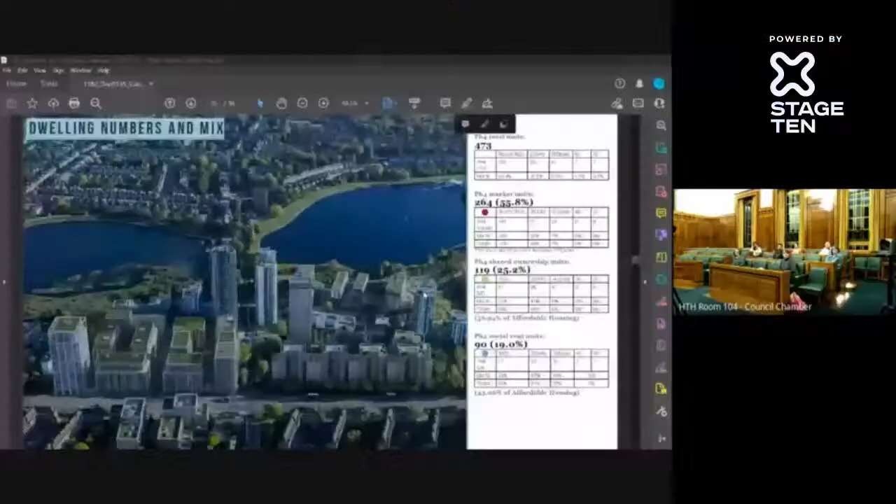Is it this one or the ground level view you were after? You had a view which was, I think, called north or something. So you had a north one and a south one, and the north one just showed how this was a sort of solid block along that side of Seven Sisters Road. I mean, obviously, we're not now considering what's going to happen on the south side, but the assumption from your pictures was that the south side would look different. Might be the aerial view.

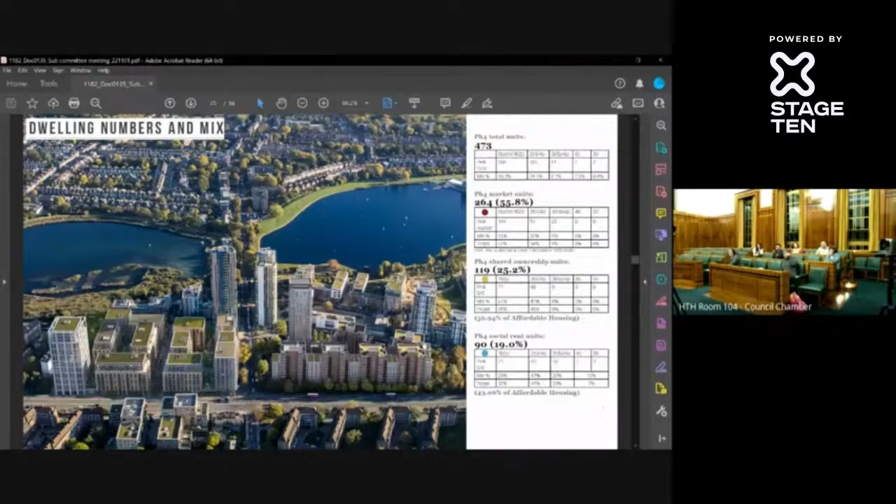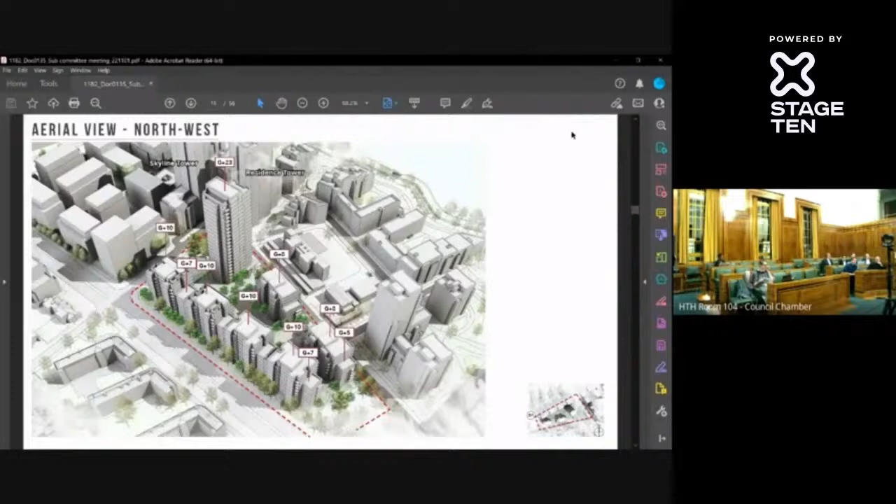Despite everything you've said, I'm not sure I completely understand why there can't be any gaps between these buildings, which would allow people to travel between them and just feel less canyony. That's it. Yeah, that's without losing significant numbers of homes. The other thing to bear in mind is, I suspect one of the other questions we're going to come to is on the podium. So I don't know if you want to deal with that now or later on. Right, we'll leave that one for later. But clearly the provision of a podium does affect the ability to transit through the site.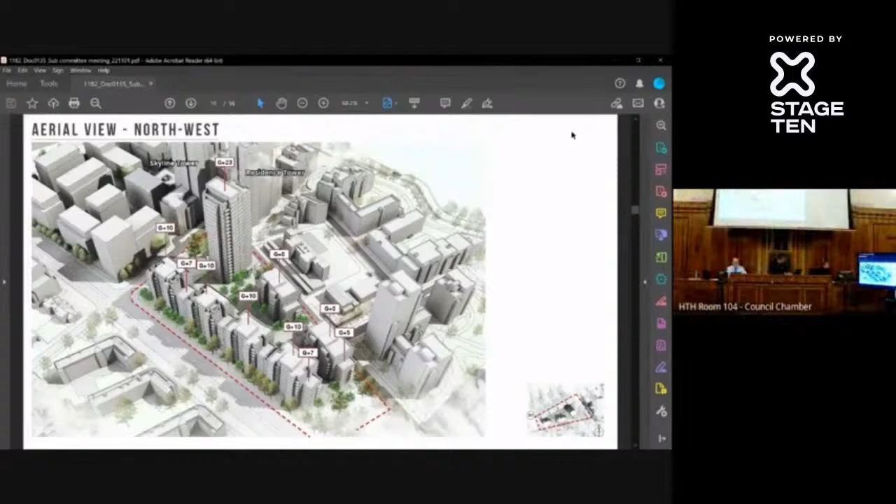Sorry, explain that to me. Where's the podium, and why does it have an impact on the four blocks? So if I go to the ground floor plan. Because the centre of the site is occupied largely by parking provision for the residents, the gardens above are at first floor level, and so you couldn't get a street level break between the buildings.

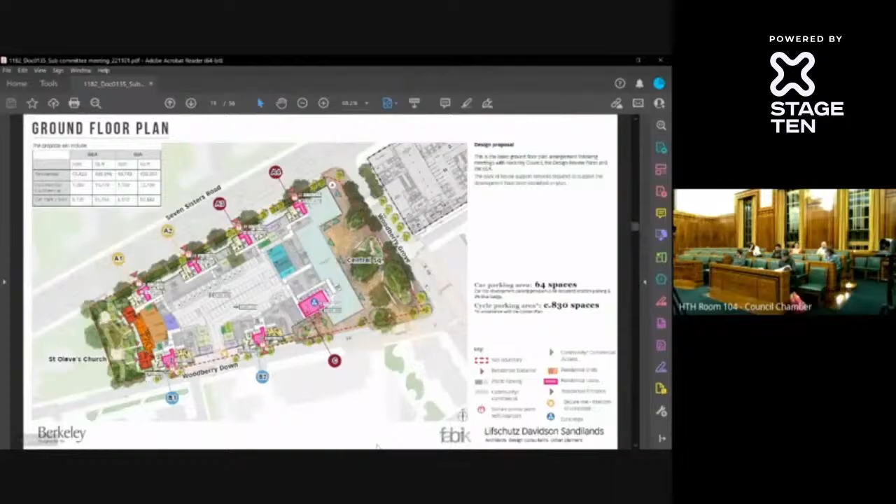Okay, great. Councillor Potter and then Councillor Desmond, your question might be useful in this phase after this. Is that all right? Councillor Potter. Microphone, please. Thank you.

So page 17 and officers' comments in 5.15. So you say, while the layouts are legible and appear to meet the minimum space accessibility standards, there's uncertainty as to whether the accommodation will as a whole provide an adequate standard in relation to light, cross ventilation and overheating. So I was wondering, officers, whether you would be able to explain those comments more fully, and then over to the designers, and then back to officers would be useful.

Excuse me, I'm just getting the correct page up on my screen. I know we've been providing some detailed daylight and that kind of thing. So page 17. It's page 17 in the agenda pack, and it's 5.15. Sorry, I'm terribly sorry. Is this the officer report or the presentation pack? The officer report. Sorry. I apologise. Could I possibly have a copy?

I do apologise. I wrote it a while ago. 5.15. So, in the middle of that paragraph, you talk about: there is uncertainty as to the adequate standard of accommodation in relation to light, cross ventilation and overheating.